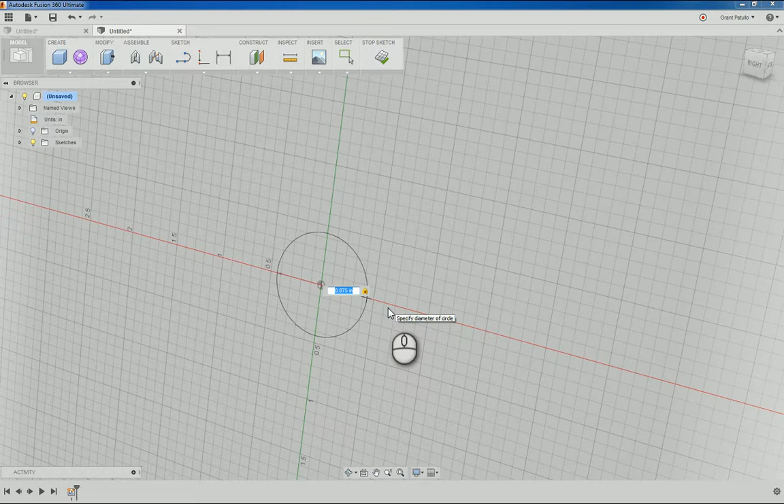So I'll start off, change my units to inches, create a cylinder on that plane. It's 0.875 diameter by 2.25 inches long.

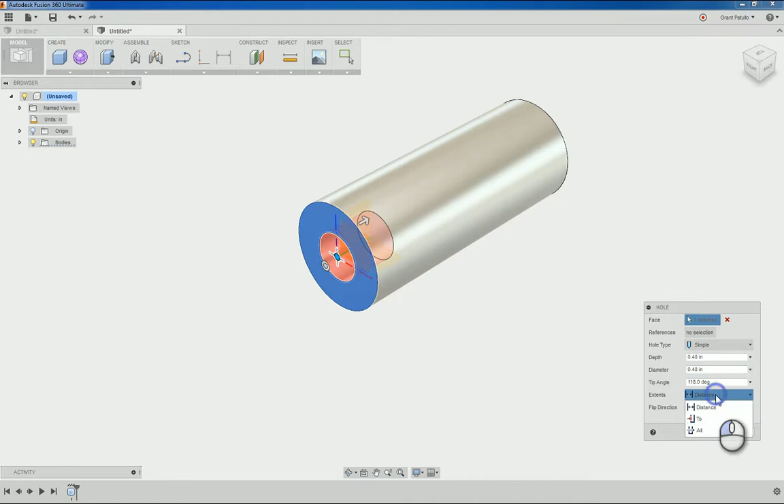We had a 0.38 hole, and also we'll click on that face on the origin, a distance through all, a diameter of 0.38.

Right, so now we need to make the cuts in the front, and use the 2-point rectangle tool. We're going to sketch on that face.

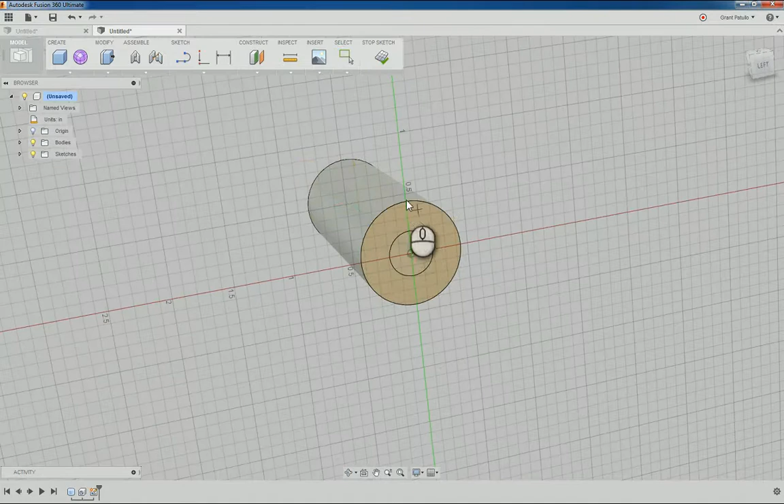Alright, so he came just off center, so I'll click just to the side there, and come down just past center, and now 1/4 inch wide.

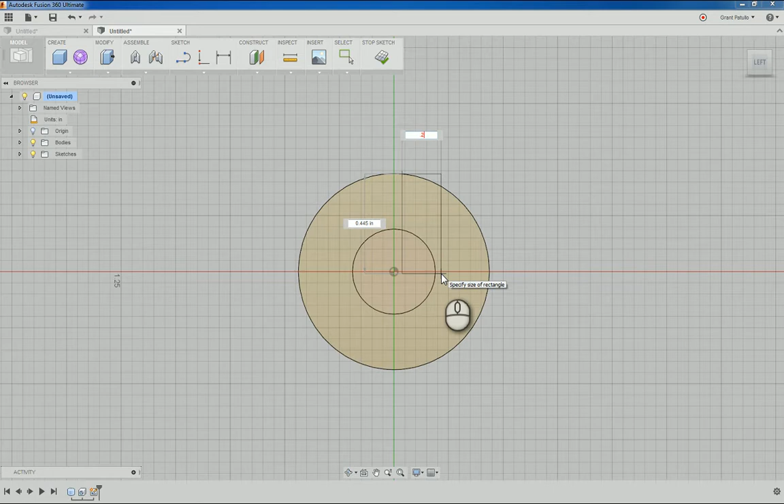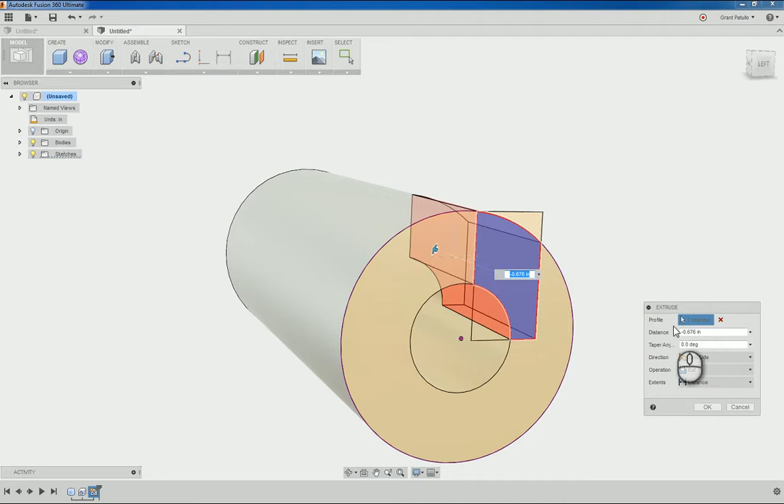Now we'll use the press pull command on that surface. We'll make an extrude cut, 3/4 inch, 0.75. Let's change that to cut. Got to put negative in front, negative 0.75. Rightio, so we'll get our first cut.

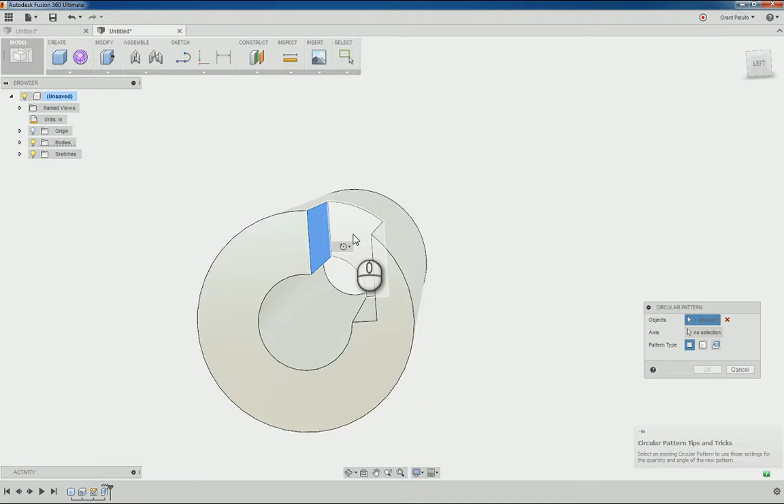Now we'll do a pattern. So this will be a circular pattern. Actually, you can just come down here and click feature, click down there in the timeline, and choose our axis. Just use this as our axis. I'm going to do 4 of them, and click OK.

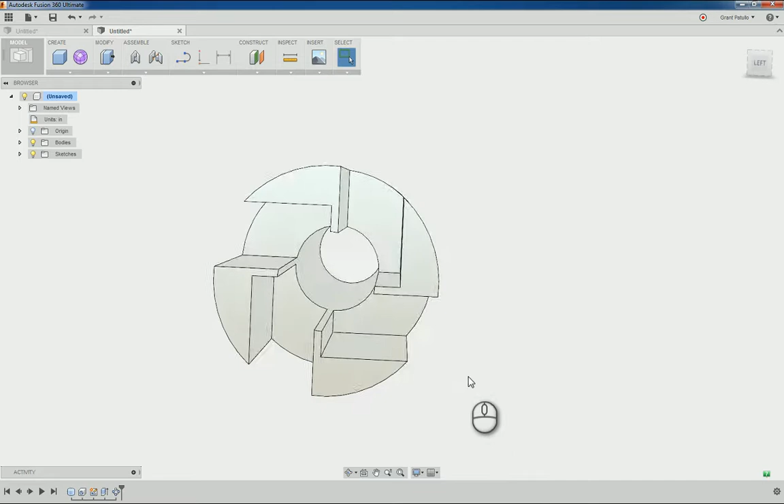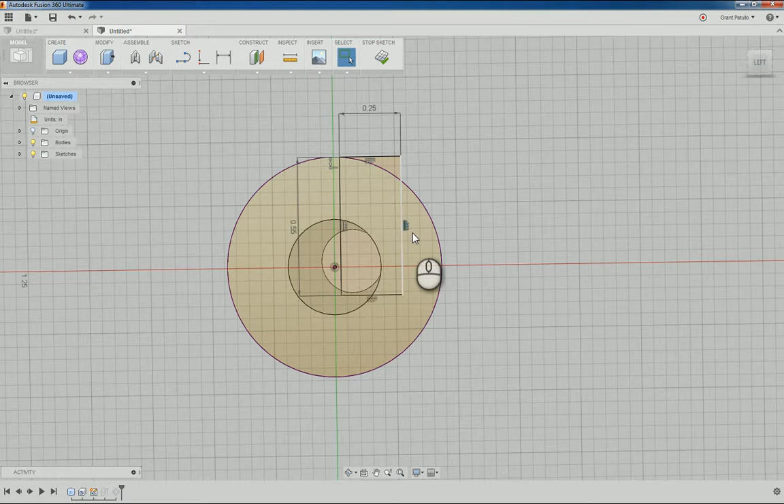Alright, so I haven't come down far enough on that sketch, so what I can do is come back in, edit that sketch, change this dimension, or... can't drag it, can't drag it because it's got the dimension in there. Could just delete that, or make it a bit longer, 0.55. Stop the sketch. That's right, so that sorts that out.

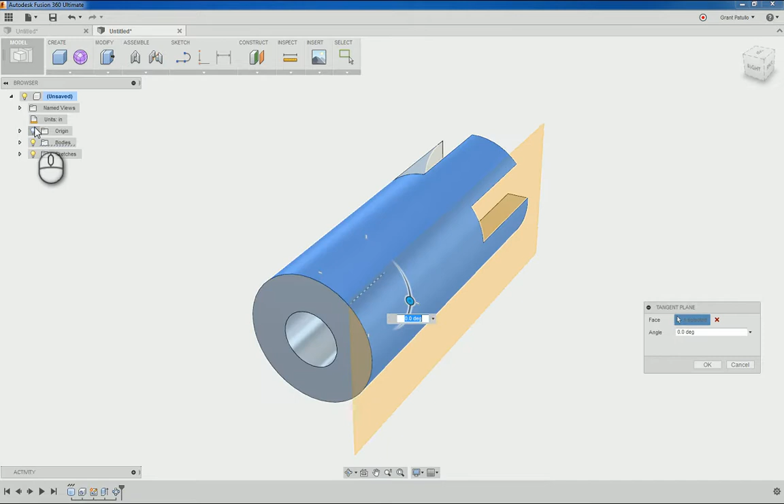So take this home. Right, we need to construct a plane, tangent plane on this face. Turn the origin on so we've got something to square it off, and we want it to be square to that plane. Let's do that.

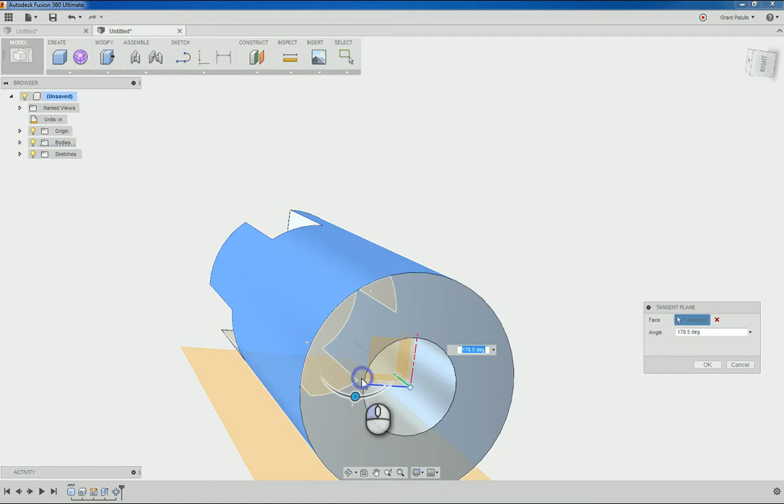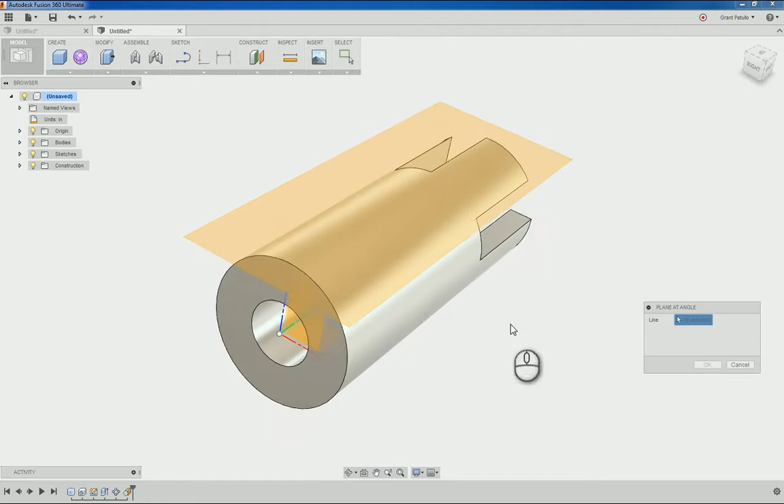And we need a plane at an angle. Plane, sorry, I need another tangent plane on this face. But around 10 degrees from that, so 303.

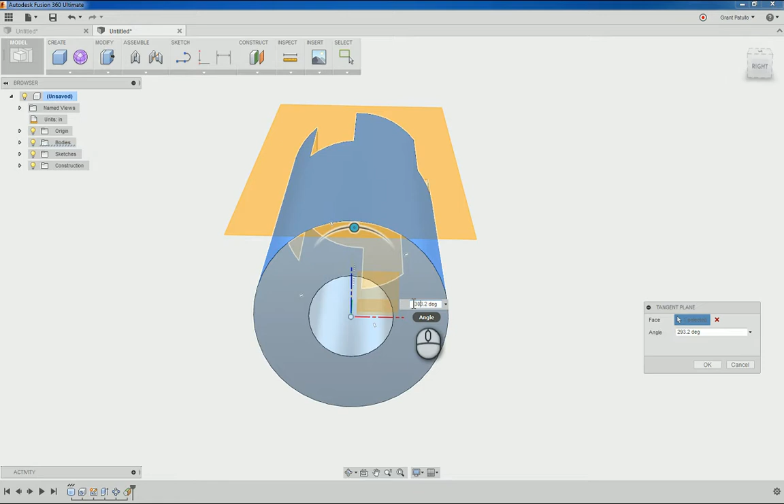Right. So that's our tangent plane, so we'll name that tangent. And we'll name this one tangent plus 10.

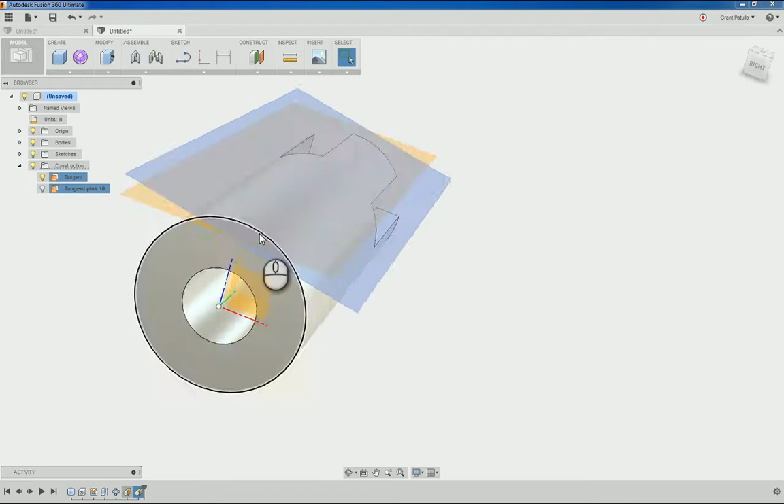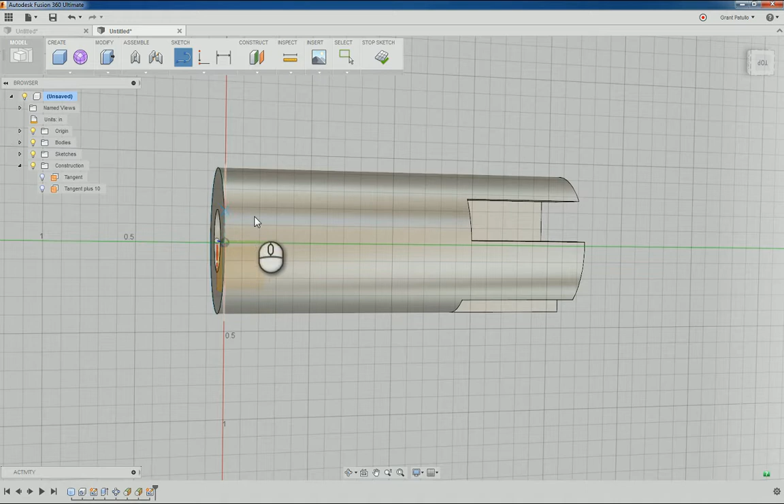I need to put in some construction lines. There's another trick too. If you're not squared off to the face or the angle that you're looking at, it won't snap to parts of the model. But if you square off to it, then it will.

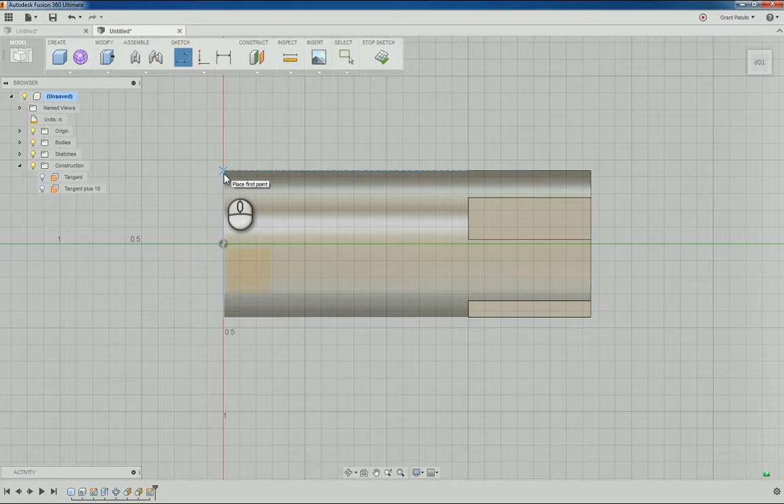So this first one is in 500, or half an inch, sorry. Alright, we'll make this line construction.

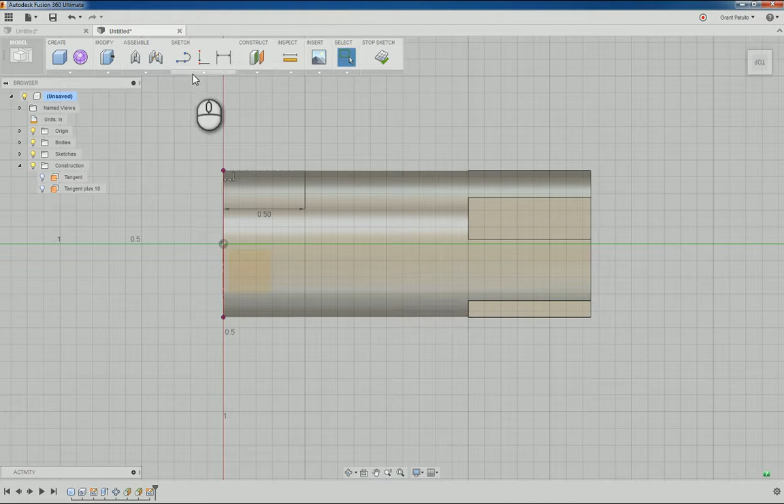And we'll do a slot next. Center to center should be fine. So the angle's going to be 30 degrees, so 150 off 180. Sorry, 150, enter. So that'll stay locked at 150. We just need to get the length. So that's center, that's 0.625.

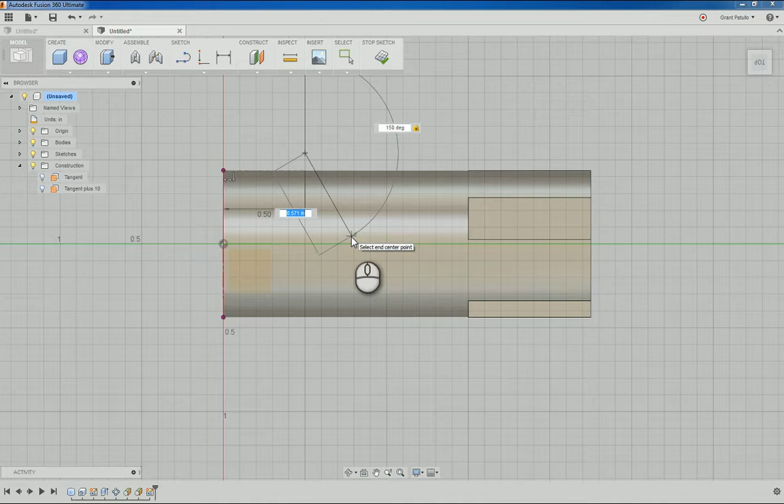So I'll make it 0.525. And slots. Sorry, I had a measurement here, didn't realise. It's 270.

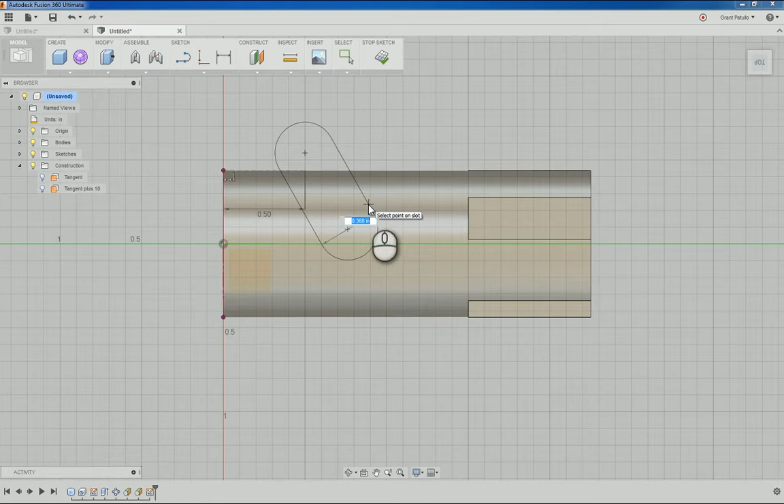Yep, right, click on that. This here I need to change because that should have been 375. So select tool, click on that dimension, and that should be 375.

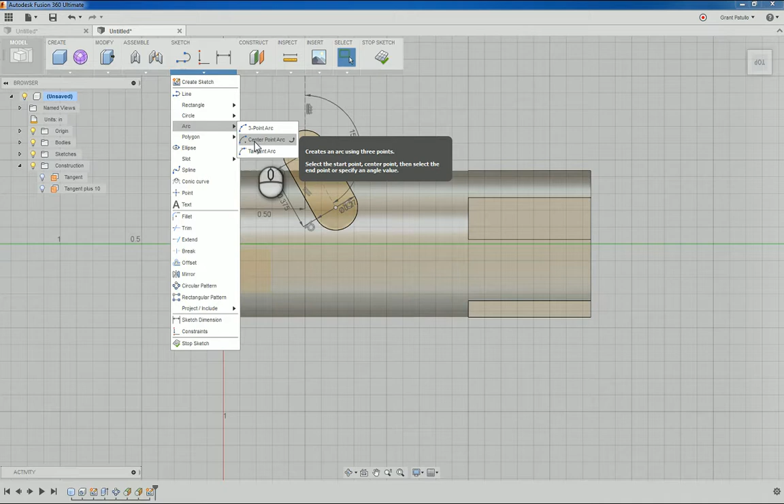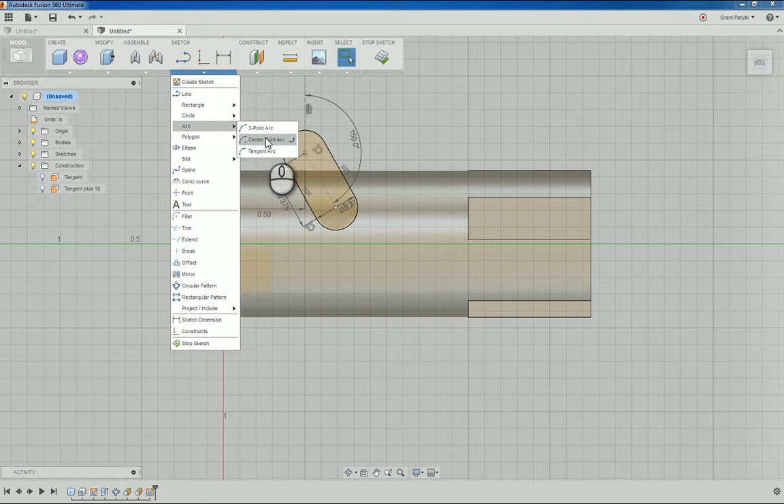Then I'll add in another center point arc, and just come back a little bit. I don't think there was any critical dimension on that second arc.

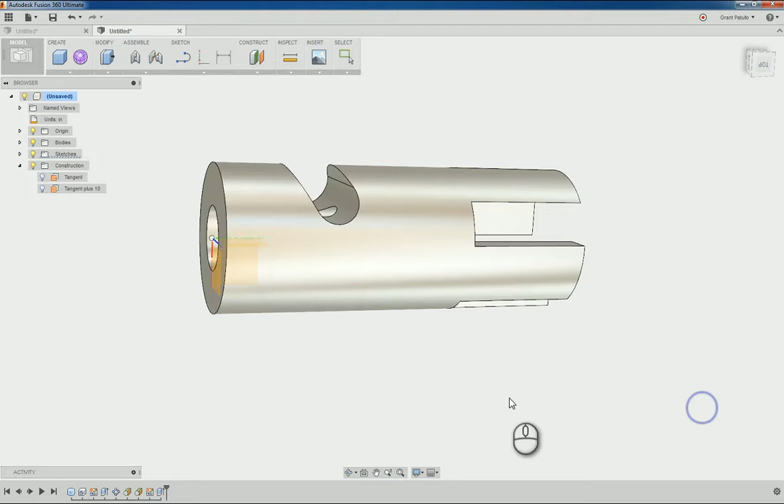So we use a press pull command again, and we're just going to drag it through the other side. Click OK. Fire up that sketch again, and we'll do the same on this portion, but we'll only come through halfway, somewhere around there. Okay, hide that sketch.

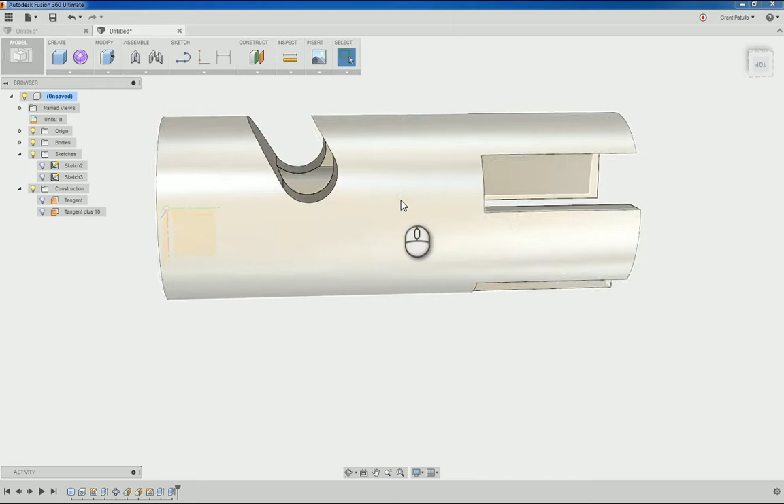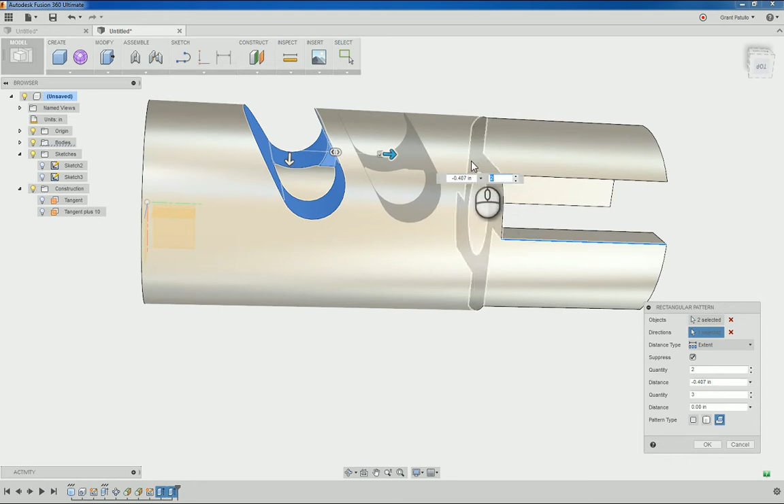Alright, so now I need to pattern it. Rectangular pattern. Pattern a feature. That one and that one. And the direction, just click on this line to give us a direction. Go forward. I'm only going to do 2 of them. And they're 1/2 inch apart.

And now we'll mirror these features.

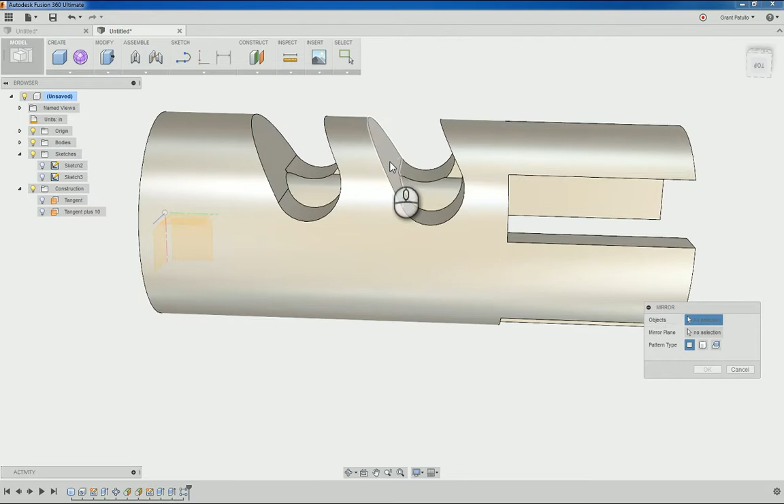Around that plane. Okay, alright, it's looking alright.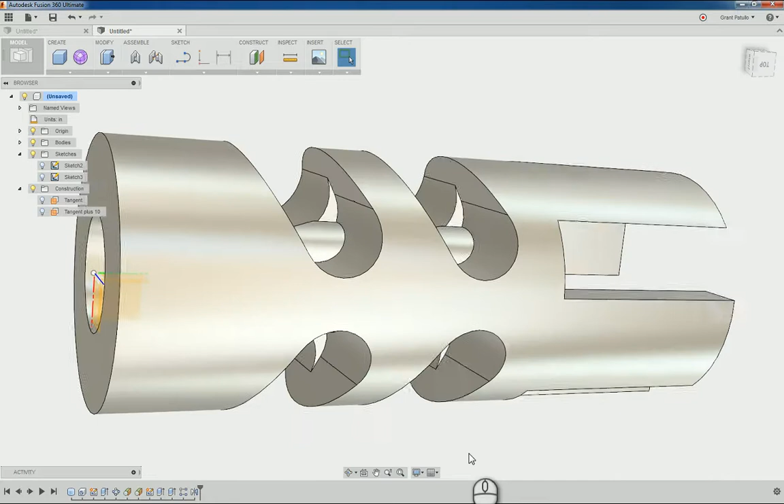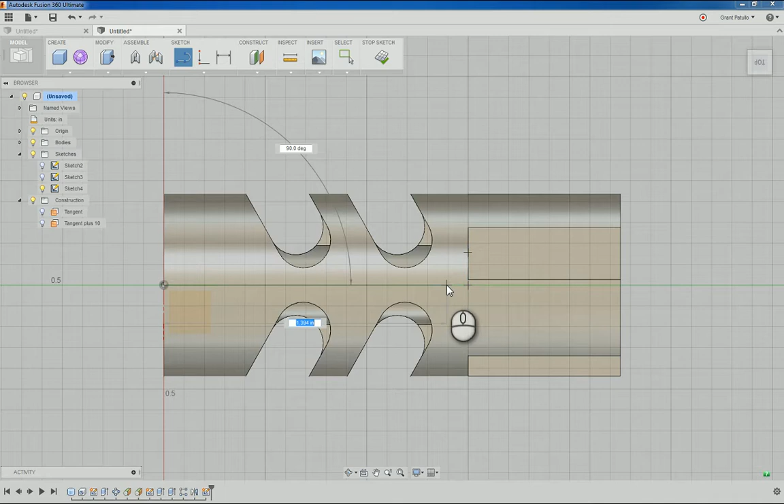The next thing I need to do is another construction line on this tangent. So on that center origin, we're coming down, come down 1.394. And we'll drop a sphere on the end of that, make it 0.06.

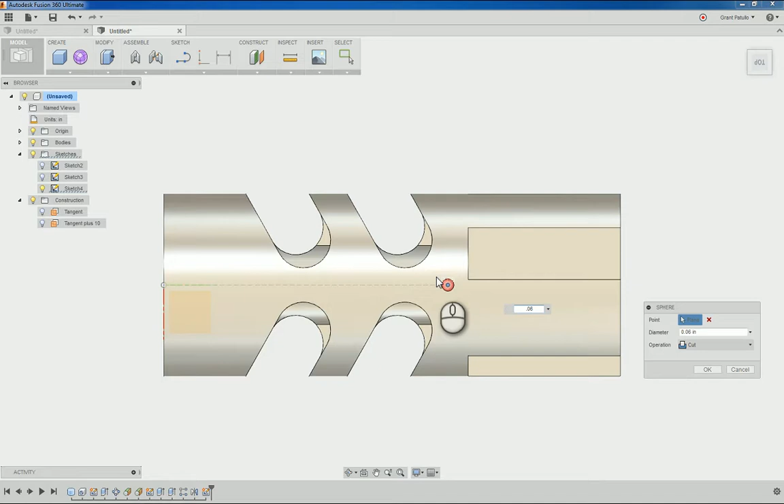So let's cut ourselves a little dimple in that surface.

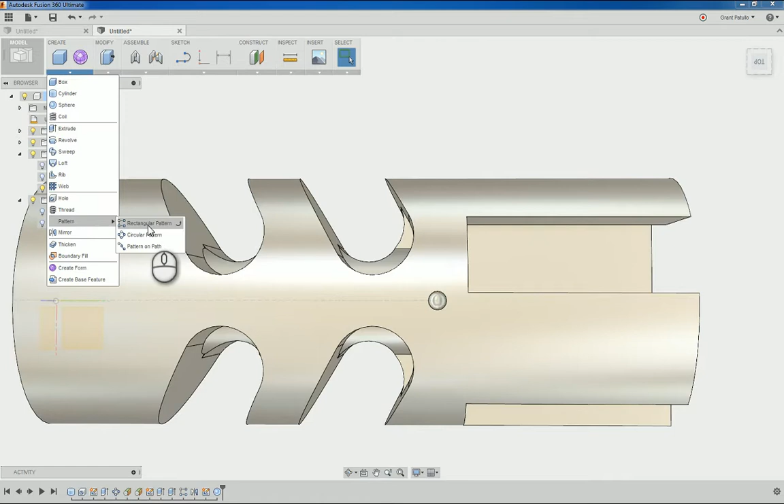We'll do a rectangular pattern. Select that. Okay, we just for direction, just select one of these lines. Forward is going to be 3 of them. I'll make it 750.

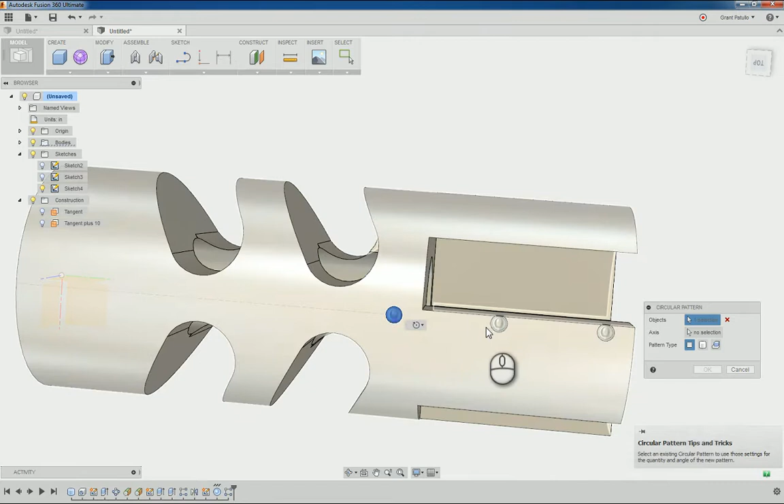And we'll do a circular pattern on them. So select our 3 objects. Axis, just be on this center there. There's going to be 18 of them.

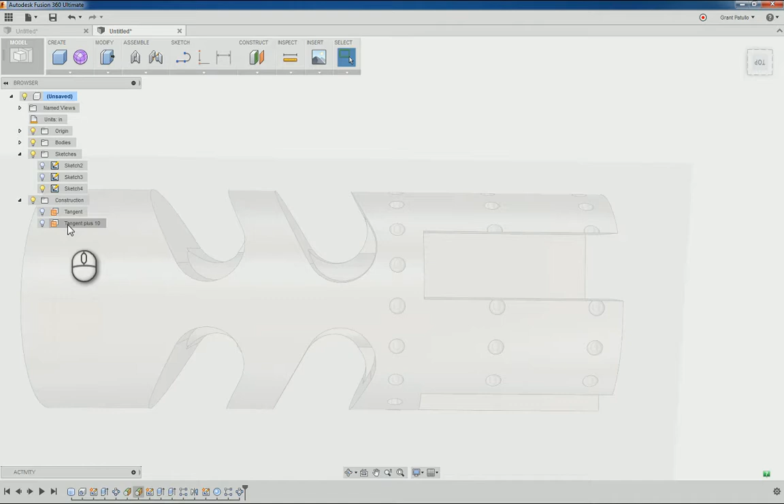Alright, so the next one, do another line on this plane. So now we'll come down 5.

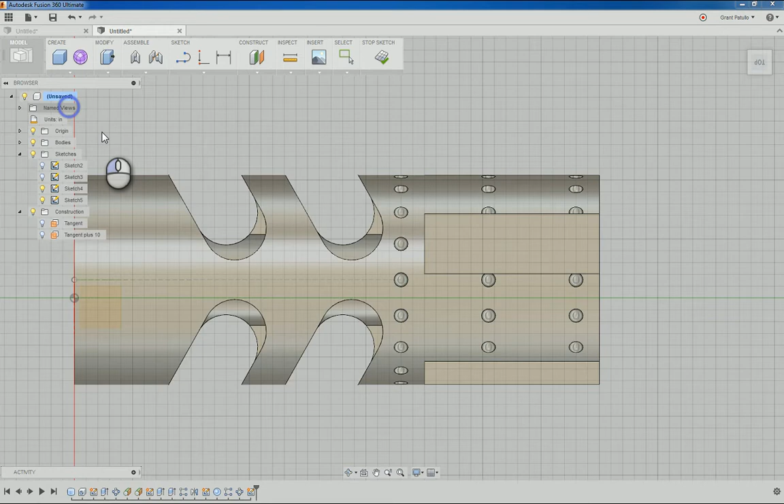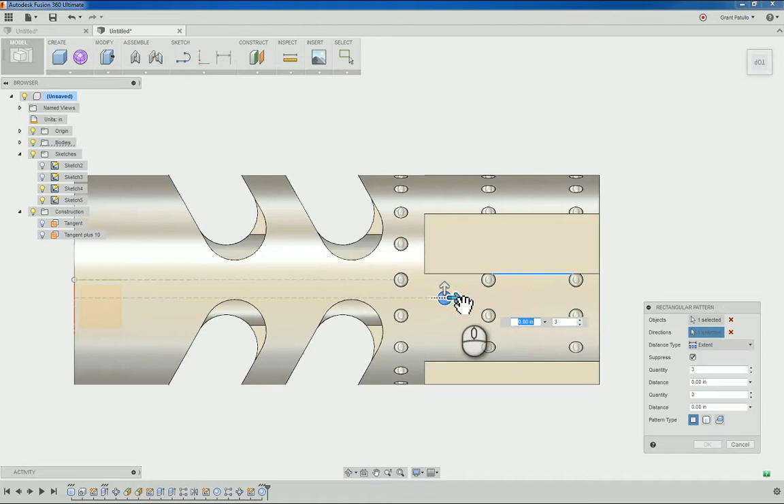So another sphere on that point, 0.06, same deal again, rectangular pattern. This time we're only going, leave it 3, direction, I'll make it 750 again. And a circular pattern.

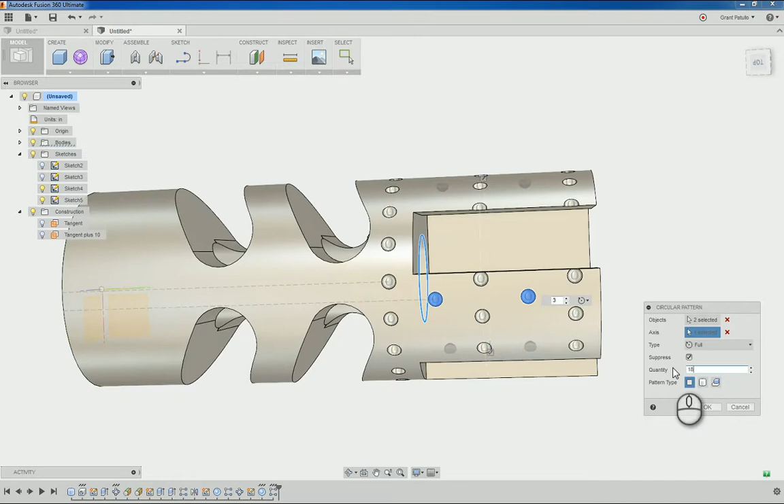Alright, so we've got our little dimples. And I need to put a thread in the back here. I can't remember what thread John used, so I'm going to put a thread on that face.

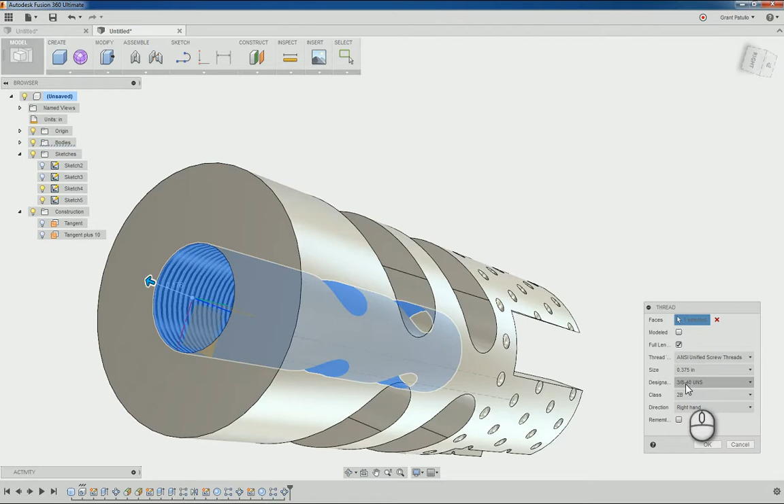It's given us a 3/8-40. I'll just leave it at that, not going to go full length. 394, that's fine, just leave it at that. There's a thread in there.

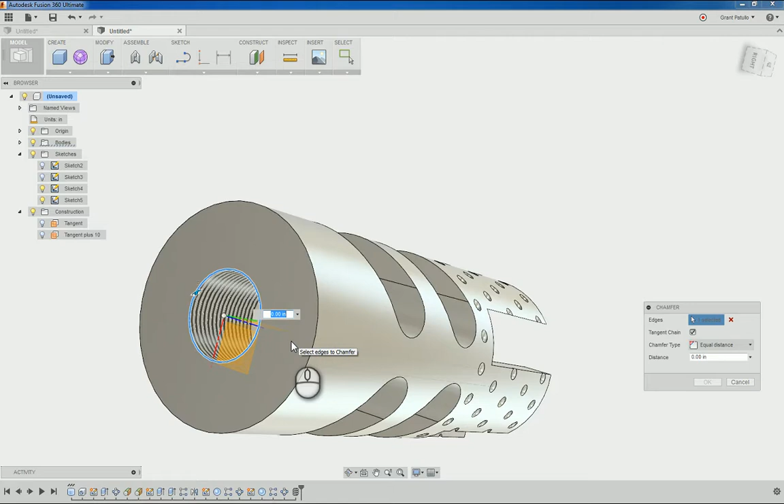Chamfer. Give it a 40 thou chamfer, not too big. That's cool.

Then yeah, we need to put the logo. This is one thing I couldn't get to work. I made an SVG and tried to import it, but I just could not get it to work. I think that's one of their updates, is getting these SVGs a little bit more polished. You've got the insert SVG command, but it's very hard to work with it. You know, it's quite limiting what you can do.

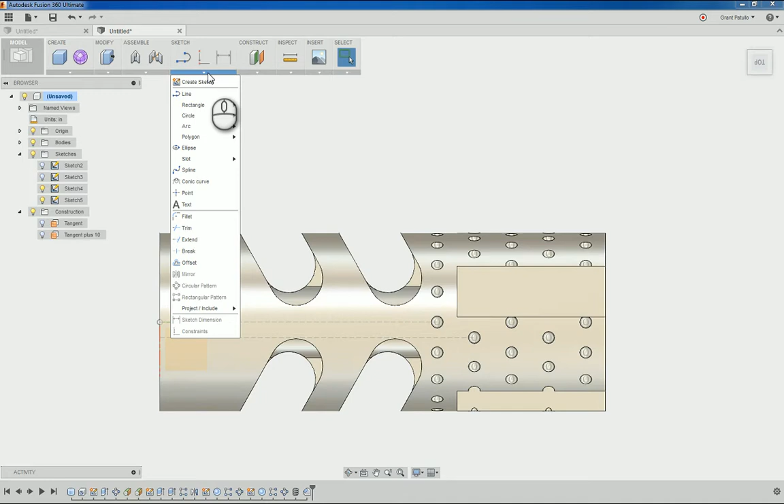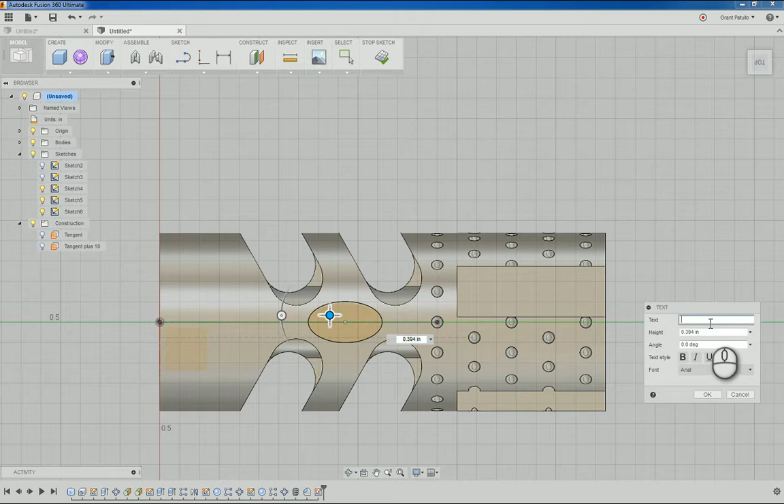So yeah, I've just drawn an ellipse on that tangent, on that center line, somewhere in there. Then I'll bang in some text, says Saunders Machine Works. Around 0.1, that's about right. Maybe 0.15, that's too big.

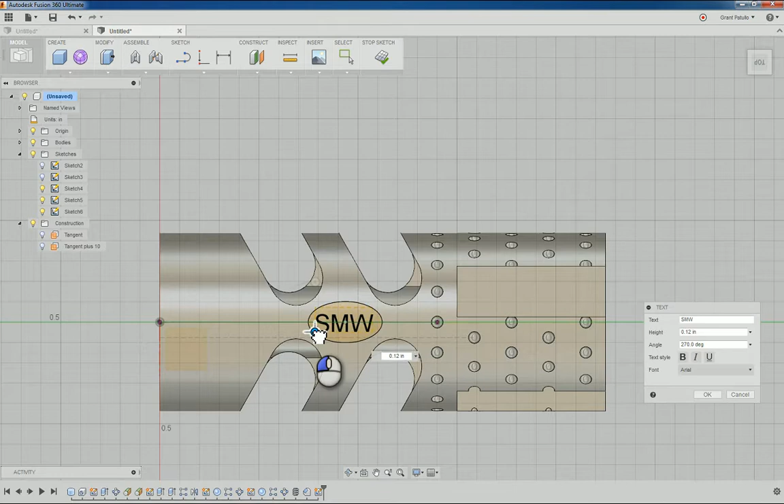Alright, next step. What is it? It should be a construction line, which it is now. Next step, you need to explode the text. So now I can click here, use the press pull command and make a cut.

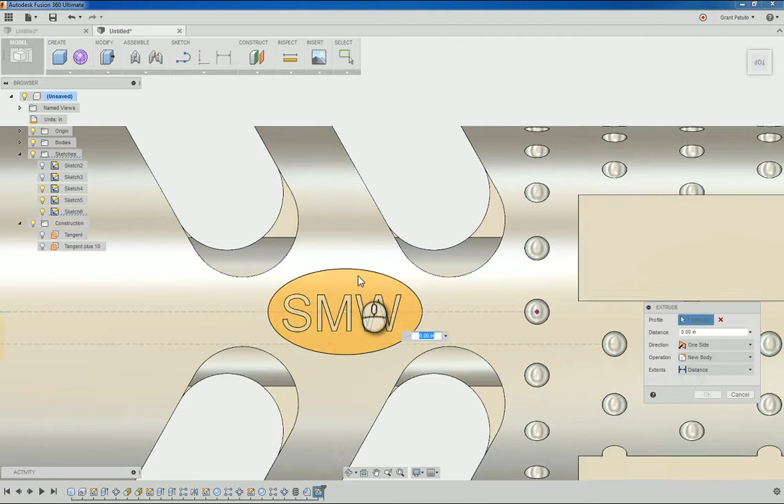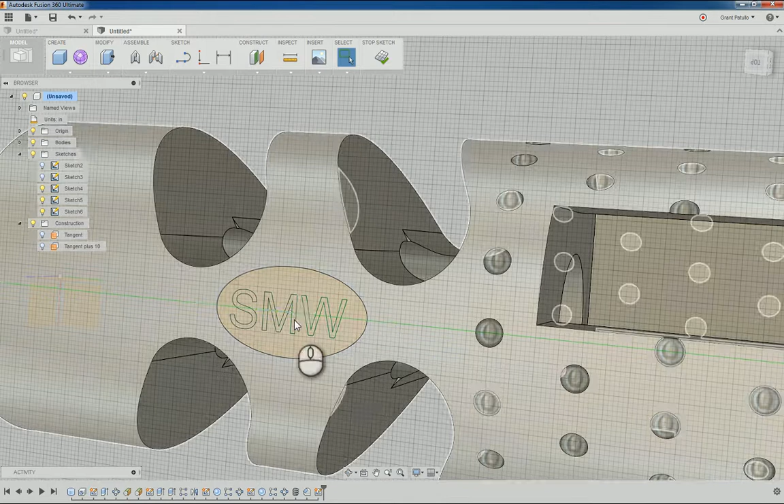It doesn't want to do it. Oh man, why the hell not? Let's delete that line, see if that's upsetting it. Nope, doesn't like it. Undo.

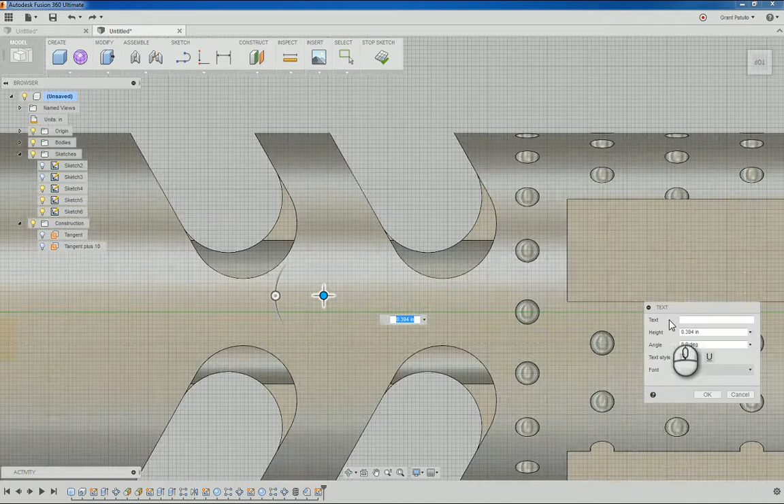I'll put the text in first and see if that works. So SMW. Now this rotate won't let you go. Oh, it will. Man, this program keeps popping up all these tricks.

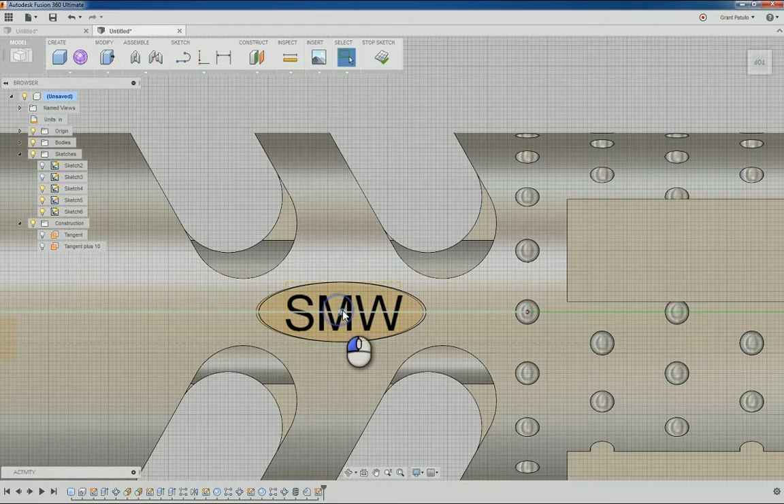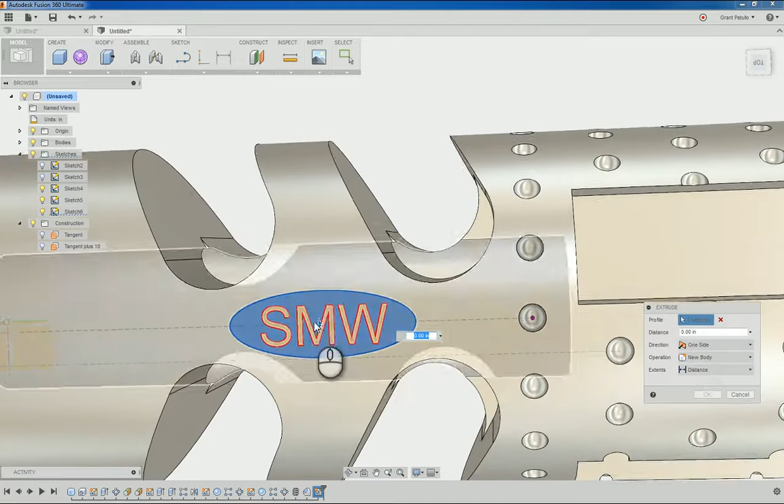So now I'll bring in the ellipse, maybe it'll work this way. I've got to explode that text. Alright, so she's worked that time. Don't know why. So you got to put the text first, then the ellipse, not the other way around.

But that's the best I can do. I can't import an SVG. I've tried that many different ways and I just can't get it to work. I've got to put a help question in on the forum. The forums are really good, so hopefully someone can come up with an answer.

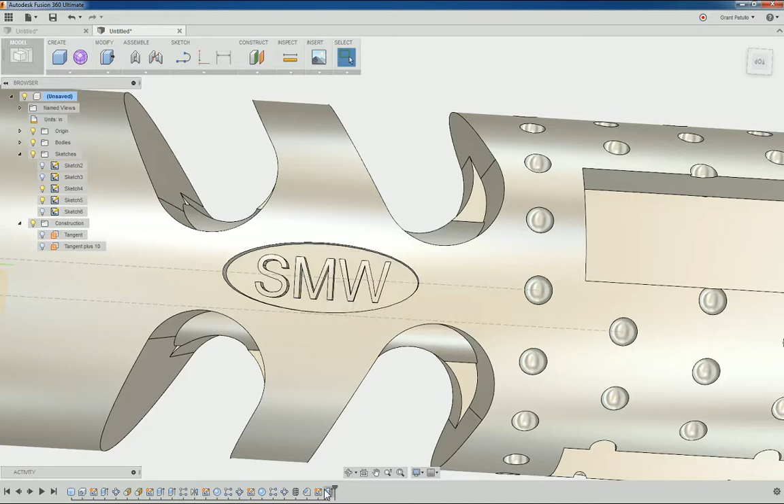So all that's really left is to just go around and chamfer up all the edges. Alright, I think I've got them all.

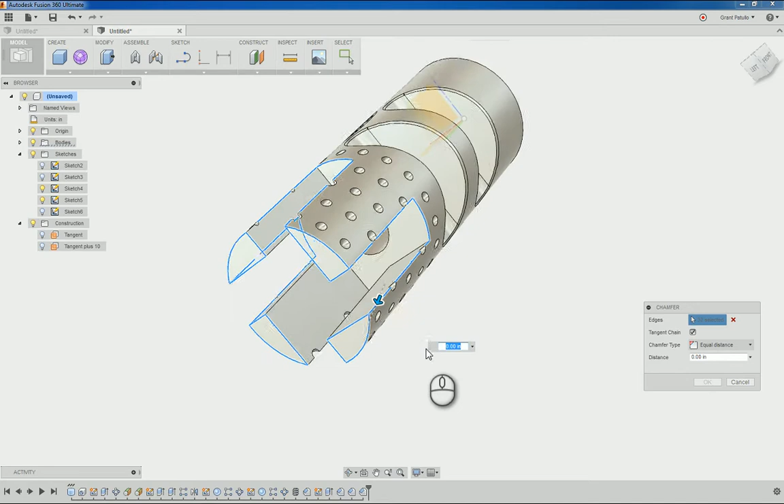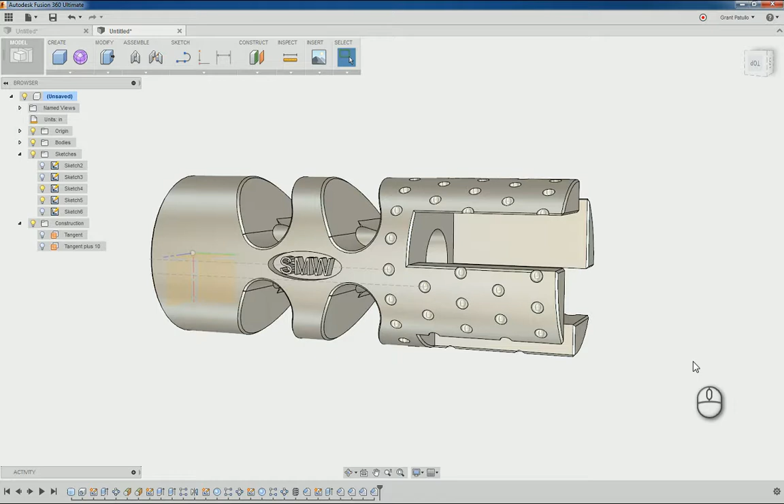Alright, that's it. I'm pretty sure that's close to how John did his. And there you go.